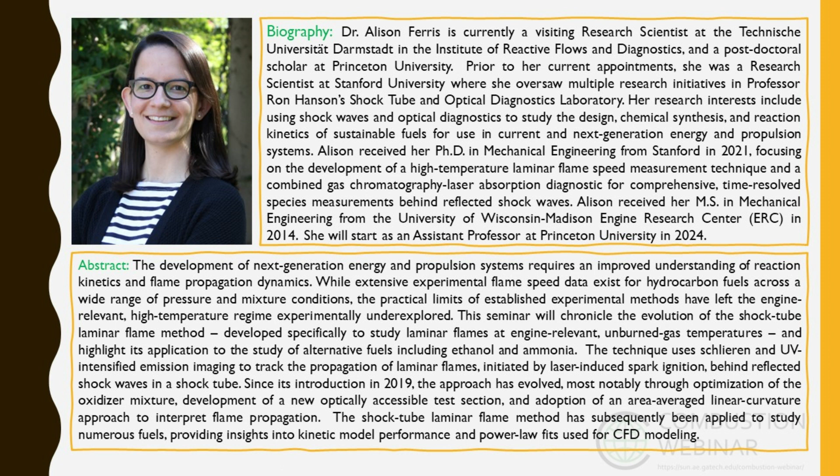I'm excited to share with you my talk on the development of the shock tube laminar flame method and its application to the study of alternative fuels. As Peng mentioned, I currently hold a dual appointment at both TU Darmstadt and Princeton, but the work I'll be talking about today comes from my time as both a PhD student and a research scientist in the Hanson Research Group at Stanford University. All right, let's dive in.

So I guess first you might ask, why develop a shock tube-based method for studying laminar flames? Well, I guess the main underlying motivation here is that we wanted to be able to measure and study flames and measure laminar flame speeds at previously unexplored high temperature conditions. And so that then begs the question, why do we even want to study flames at high temperatures?

Engine operability, efficiency, and emissions are all governed by high temperature flame dynamics. In particular, the laminar flame speed is a global property that captures thermodynamic, transport, and chemical kinetic information about a fuel and air mixture. Laminar flame speed is defined as the rate at which a planar laminar flame, 1D, propagates through a quiescent mixture of unburned fuel and air, or fuel and oxidizer mixture. Throughout the talk, I'll be abbreviating it as this variable here, SU0.

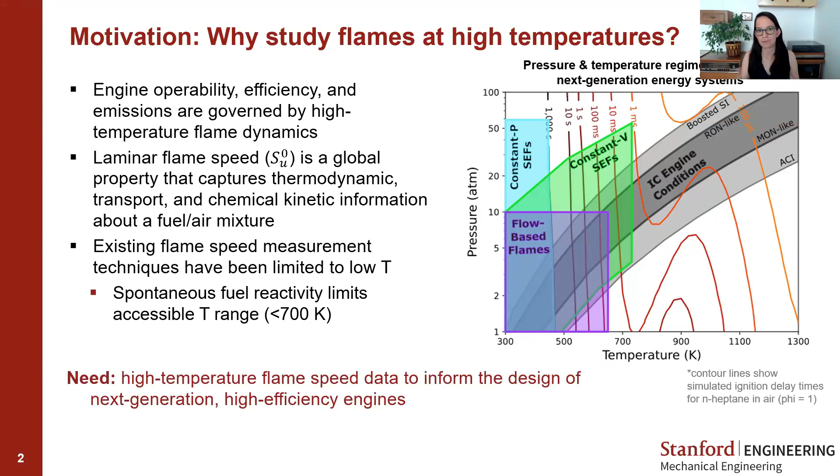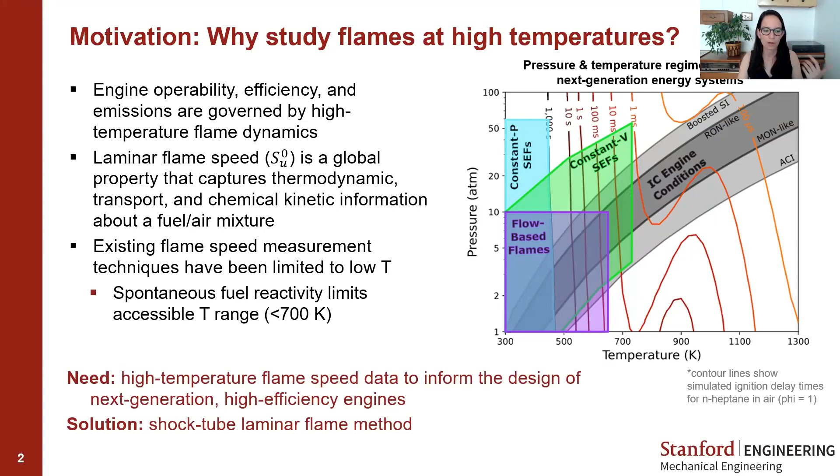What that means is that there's a need for high temperature flame speed data in order to inform the design of these next generation high efficiency engines. And so the solution that we came up with, and that we've been working on for the past couple of years, is what we call the shock tube laminar flame method. That's the main focus of my talk today. I'll talk about the development of this shock tube laminar flame method.

First I'll start with some shock tube fundamentals for those who aren't very familiar with shock tubes. I'll then talk a little bit about the first generation laminar flame method. This actually encompassed most of my PhD work. Then I'll move on to how we designed a new sidewall imaging flame test section, which then led to what we call now our second generation laminar flame method. After that, for the second half of the talk, I'll switch to how we actually apply this method, specifically to the study of two different case studies: one looking at ethanol and isooctane laminar flame speeds, and then give you a sneak preview of some of our most recent ammonia flame speed work.

All right, so let's start off with some shock tube fundamentals. So what is a shock tube? A shock tube is an experimental facility that we use to study high temperature chemistry in a controlled environment. I'm showing a picture of it here. In a nutshell, it's a very long stainless steel tube, but it acts as an impulse heater.

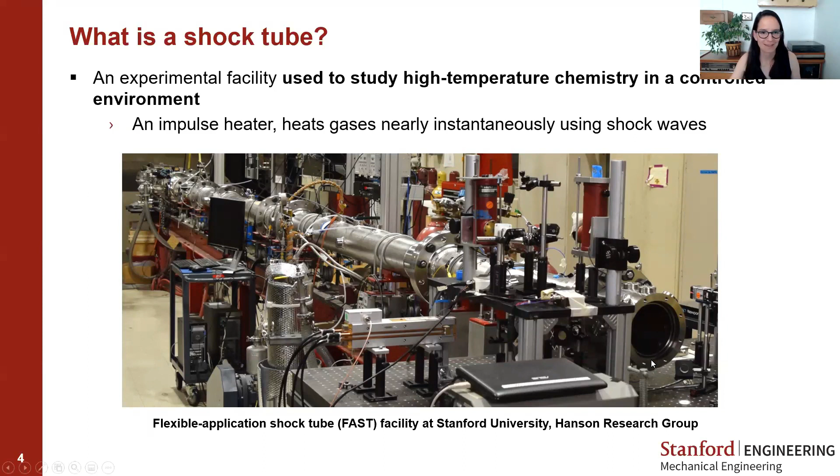So what we use these tubes for is we use them to generate shock waves, which then shock heat fuel and air mixtures, for example, up to elevated temperatures and pressures. We're able to shock heat these fuels to those high temperatures nearly instantaneously. This facility that I'm showing here is what we call our flexible application shock tube at Stanford University in the Hanson group. So how do these tubes actually work?

Well, you have a long tube, and it's divided into two sections. You have a driver section and you have a driven section, separated by a diaphragm, typically a piece of plastic or thin metal. In a typical experiment, you'll first fill your driven section with the fuel or oxidizer mixture that you're interested in studying, usually filled to pretty low pressure. Then you'll fill the driver section with high pressure gas, typically helium, nitrogen, or a combination of the two.

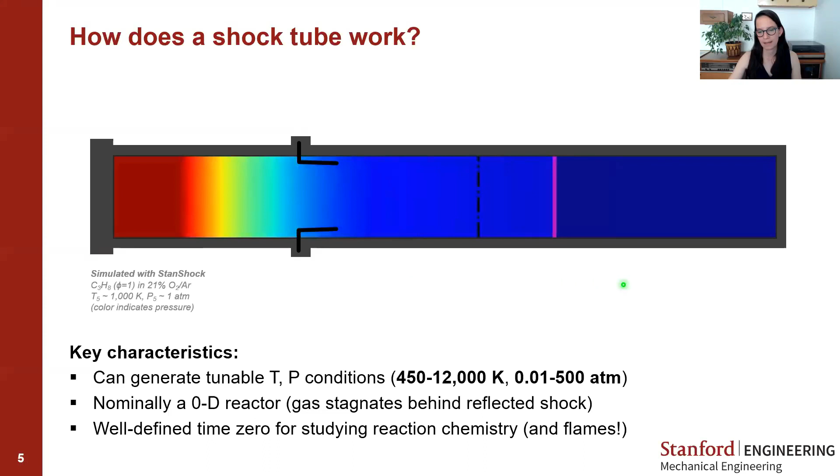So in this experiment, you've now got your driven section filled. You'll start to fill your driver section, keep filling with high pressure gas until ultimately the diaphragm bursts and it sends a shock wave down the tube. That shock wave then hits the end wall and reflects back. And it's in this post-reflected shock region of gas that we then do our experiments.

Some of the key characteristics of a shock tube that are useful, for example, for studying laminar flames: we can use them to generate tunable temperature and pressure conditions. We can hit a wide range of temperatures and pressures, ranging from about 450 Kelvin up to 2,000 Kelvin or even higher, and also pressures ranging from subatmospheric to hundreds of atmospheres.

Also, a shock tube is what we consider nominally a 0D reactor. Because this gas behind the reflected shock stagnates, you now have gas that is just sitting there at the designated temperature and pressure, and we can now model it as a 0D reactor. And finally, shock tubes have a very well-defined time zero. What I mean by that is, because we're using a shock wave to shock heat these mixtures, we know very precisely when those mixtures have reached the temperature and pressure that we're interested in studying, because that shock process happens over a matter of microseconds. So that means that we have a very well-defined time zero.

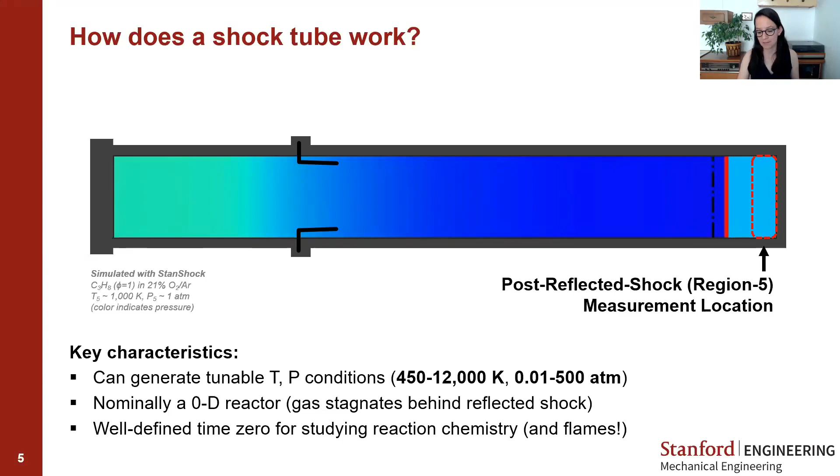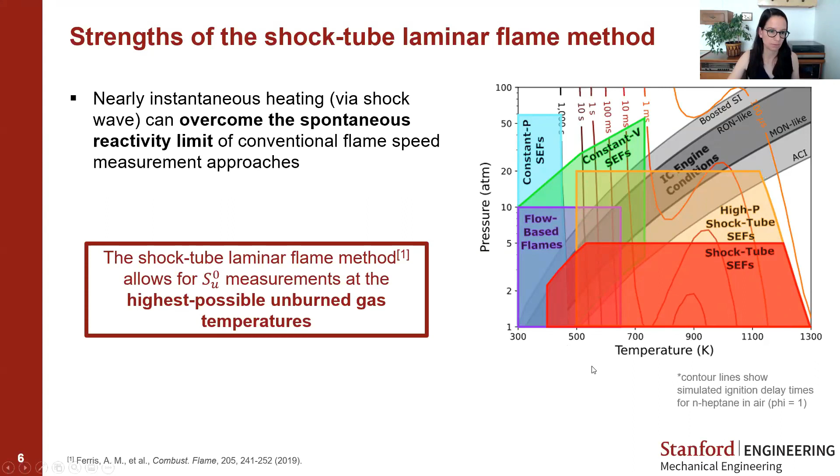All right, so with that general background, let's first talk a little bit about the first generation shock tube laminar flame method. This is what I developed as part of my own PhD work.

So the main goal of this first generation method was to measure high temperature flame speeds in a shock tube. Pretty simple, not as easy in practice to implement, but the strategy we went with was initiating laminar flames behind reflected shock waves using laser-induced spark ignition, and then observing the propagation of this flame. Something to note, a lot of the conventional flame speed measurement approaches use electrodes in order to spark ignite the flames.

But unfortunately, we're not really able to put electrodes into a shock tube, right? We've got shock waves going down this tube and reflecting. So we had to use a non-intrusive method for spark igniting these flames. That's why we've now adopted the laser-induced spark ignition approach.

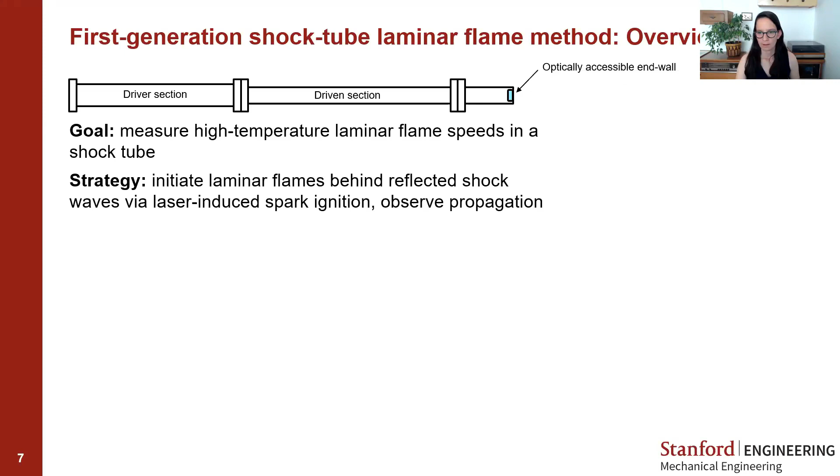All right, so if we look a little closer at this setup, this is just a zoom in on the end section of the shock tube. For these experiments, we had a high-speed camera and a UV intensifier, and a bandpass filter that allowed us to capture OH star chemiluminescence through the end wall.

And you can see here as well this a neodymium YAG laser that we used and focused down to a point in the center of the shock tube, which allowed us to spark ignite these fuel and air mixtures.

So a typical experiment looks something like this. You have the incident shock, it reflects off the end wall, and then the laser is triggered and generates a spark, and then a flame propagating in the shock tube.

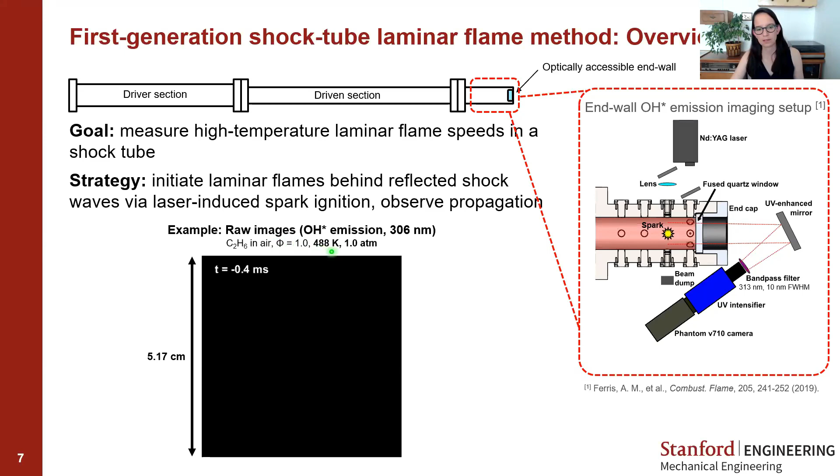So here's a look at what some of these initial images looked like. This is through the end wall, and this is just chemiluminescence - OH star emission, so emission from excited OH radicals. In this experiment I'm showing, this is ethane in air with a phi of 1, and this is a shock heated experiment, shock heated up to 488 Kelvin and 1 atmosphere.

So I'll go ahead and play the video here. We first see the spark, and then we see this flame as it propagates.

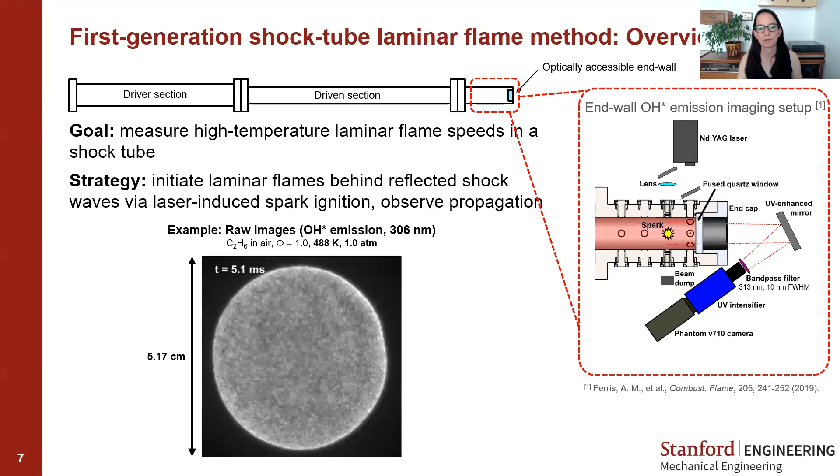So for each experiment, we get a set of images like that, and then we want to process them in order to pull out a laminar flame speed, right? So just very briefly, I'll go through the approach that we took in this first generation method.

Essentially we looked at each image, we binarized it, we used a gradient-based edge detection approach, and then we're able to determine a centroid of each flame image. From that, we were able to locally track the radius of the flame at various radial angles around the flame. By tracking that in time, we were able to get a burn gas flame speed, this SB variable here.

And we were also able to calculate local stretch rate, which is basically a function of surface area of the flame. So by getting those two parameters from the sequence of images, we were able to generate a plot like you see on the right here - burn gas flame speed versus stretch rate.

And all these data points - each data point is basically an individual flame image. So for each experiment, we want to be able to identify this quasi-steady state or quasi-steady growth region in the flame. We want to make sure that we're not considering data that's impacted by ignition or by late time flame instabilities.

And so once we identify this quasi-steady region, we then use a linear curvature model in order to determine this SB naught parameter. This is the burn gas flame speed, or the flame speed relative to the burn gas, unstretched. And then from that, using continuity, we're able to determine SU naught, or the laminar flame speed.

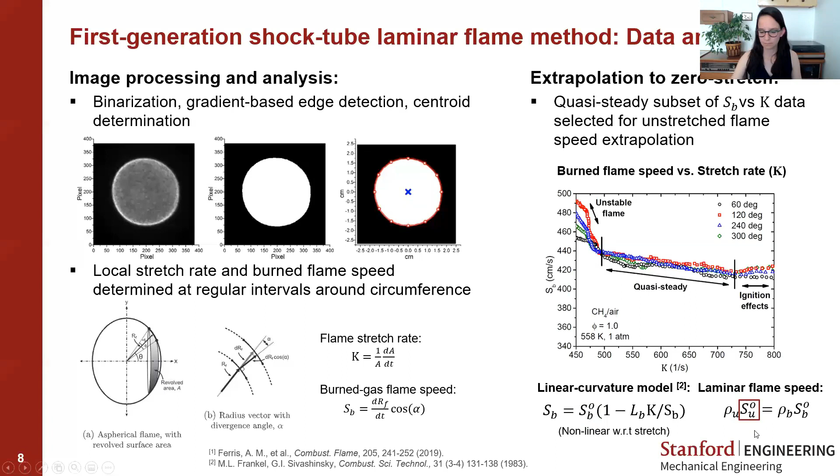So here's a look at some of this early data. This is from our first publication that I wrote in 2019, so now 4 years ago, where we focused on high temperature methane and propane flame speeds.

Moving from left to right, the black dots here are our experimental measurements. All the other points are either literature results, and the lines are model predictions. So you see methane here, in the middle we have our propane and air measurements, and then on the right we've got propane in a modified air oxidizer where we've replaced about 32% of the nitrogen with helium. At the time, these were actually the highest temperature propane laminar flame speed measurements ever published.

That was exciting, but we obviously saw that there was some room for improvement. For example, we wanted to reduce the scatter in our measurements, reduce the uncertainty associated with each point, and also push to higher temperatures.

Interestingly, you'll notice that our methane and propane flame speeds, measured in air, weren't reported above about 580 Kelvin. The reason is that at higher temperatures, as we went above that roughly 580 Kelvin point, we started to see flame distortion. We didn't report any of those distorted flames in the initial work -- we just wanted to focus on nice laminar flames propagating appropriately. But we were limited in temperature space by this flame distortion.

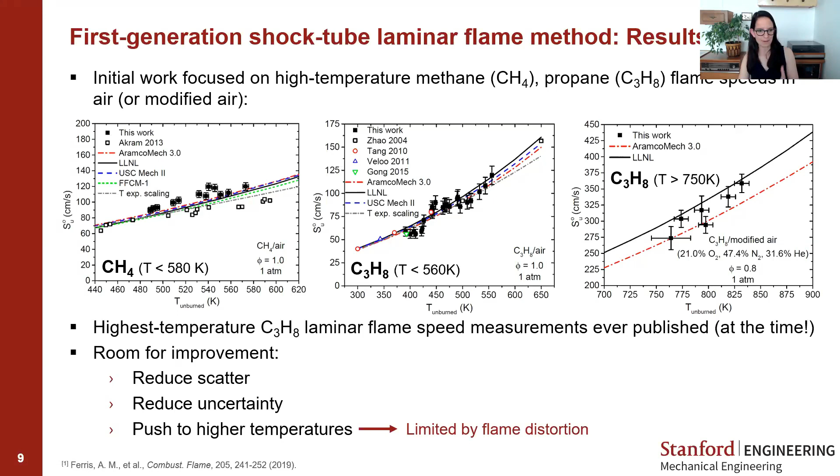So here's what I mean by distortion. This is a look at a methane air flame experiment, shock heated to 592 Kelvin. From left to right, we're going in time, and we see the initial flame kernel, and then we start to see this sort of haloing effect.

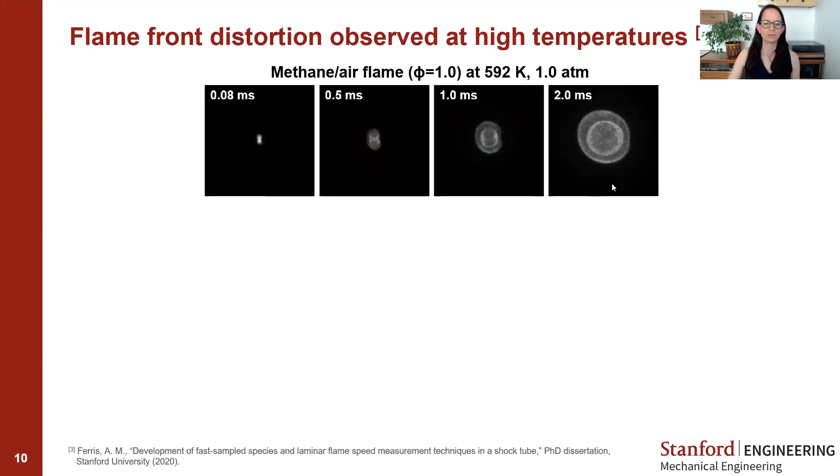What was interesting to note is that this is actually temperature dependent as well. If we look at a methane air flame at 558 Kelvin, for example, it actually looks fine -- we have a nice stable flame. But even just increasing the temperature by roughly 25 Kelvin, you end up with this haloing effect. As you keep going up in temperature, that little halo in the middle starts getting smaller, until we reach a point where the flame is just completely distorted for the whole experiment.

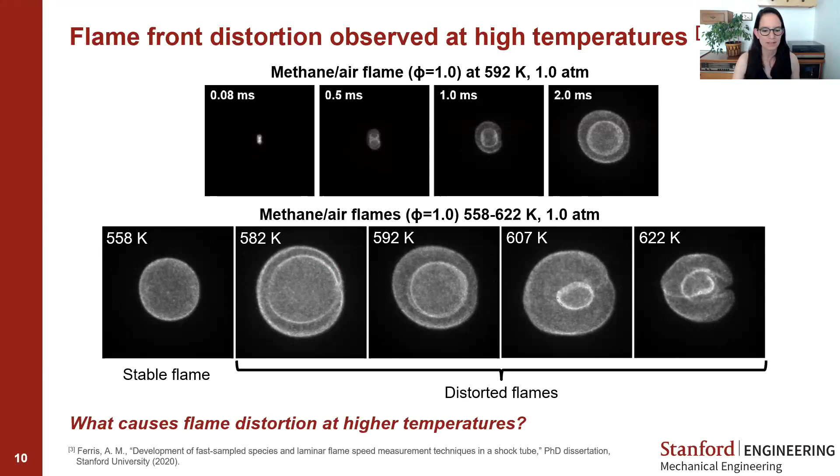Now, these aren't your typical thermodiffusive or hydrodynamic instabilities. So what we wanted to understand was really what causes this flame distortion at higher temperatures. In order to get to the bottom of this, we performed what we call a meta-analysis of factors affecting flame stability in a shock tube.

Basically, at this point we said, okay, we've taken a lot of measurements of different fuels and different conditions -- let's take a look at all the data and try to understand where we start to see this instability happen, or when we start to see flame distortion. Is there some factor, some experimental parameter, that's actually causing or linked to this critical temperature beyond which we see flame distortion?

Some of the experimental parameters we considered in this analysis included the pressure of the experiment, gamma -- the ratio of specific heats of the test gas, the average molecular weight of the test gas, the Lewis number of the test gas, and also the spark location -- where we are actually sparking those flames within the shock tube.

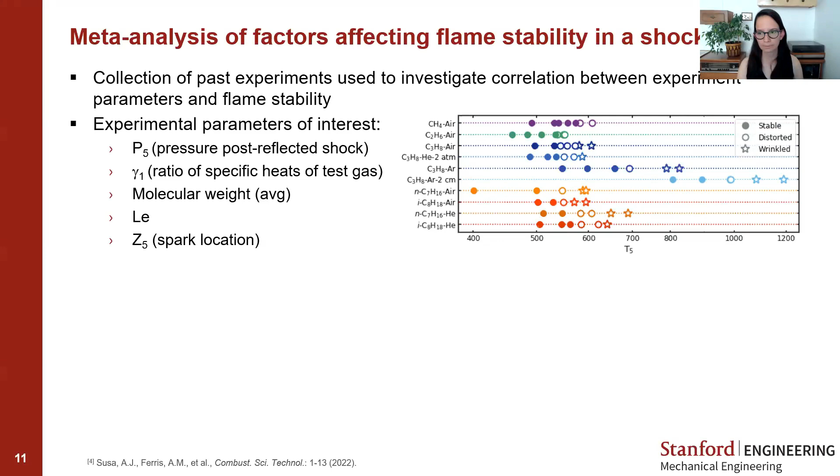So we performed a logistic regression analysis to determine an expression that would allow us to predict this T critical, the temperature at which our flames transition from stable to distorted. We came up with the expression shown here. I won't go into the math too much, other than to say that by fitting this expression to the data, we were able to predict 93% of the time, accurately, this critical temperature at which flames transition from stable to distorted.

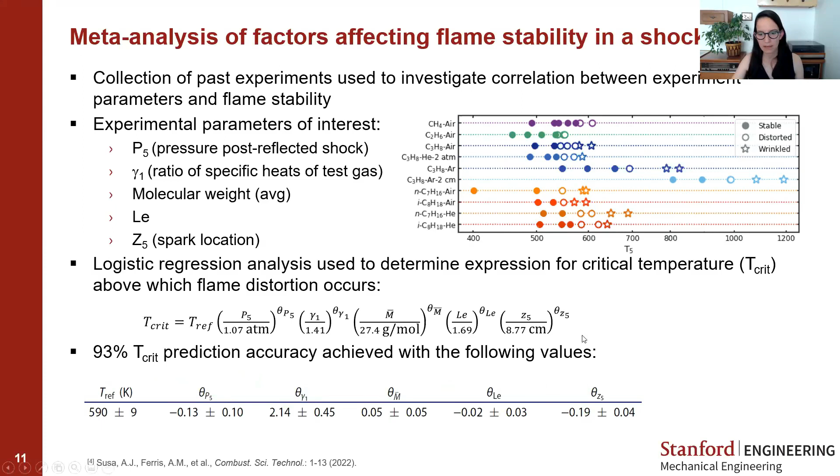Using these coefficients, these theta values, these exponential values, what we find is that the largest exponent has to do with gamma of the test gas, the ratio of specific heats. Gamma has the strongest impact on the critical temperature where we go from stable to distorted flames.

We also found that argon is a superior diluent to nitrogen, and you can see that from the data in this figure. The two data sets with the highest critical temperature, where we obtain stable flames at the highest temperature, are these two blue data sets, the dark blue and the light blue. What they have in common is that they were both conducted with argon as the diluent. The rest are either in air or helium.

Something else to note is that the next largest factor is the spark location. Looking at the difference between the dark blue and light blue data sets, they're exactly the same except the light blue data set was taken by spark igniting the flames 2 centimeters from the shock tube end wall. So we've learned that the test gas mixture we use, and where we spark ignite these flames in the shock tube, are both important.

We wanted to look into this further and figure out how to optimize, for example, where we spark ignite these flames. We are limited in our test facility because, as seen in the first generation approach, we were basically spark igniting these flames through a small optical port. So we wanted better flexibility in our ability to run these experiments.

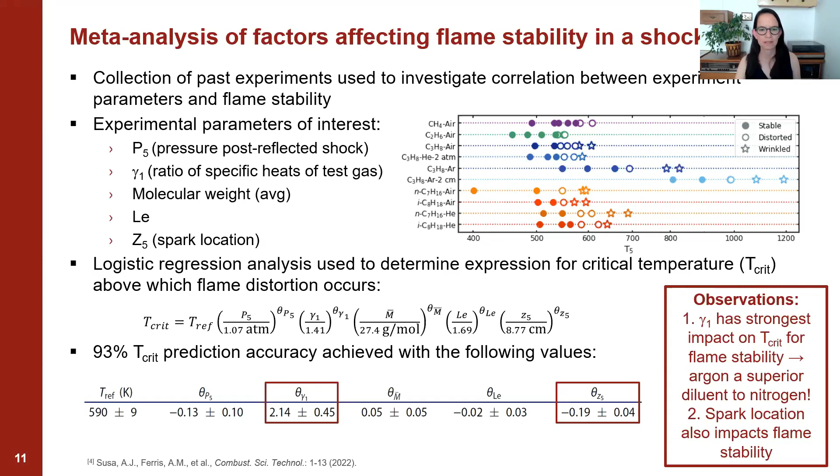That led to the design of what we call the sidewall imaging flame test section, or affectionately known as SWIFT. Every new test section needs a cool name. The primary goals of this test section were to expand our sidewall imaging access while still minimizing flow disturbances.

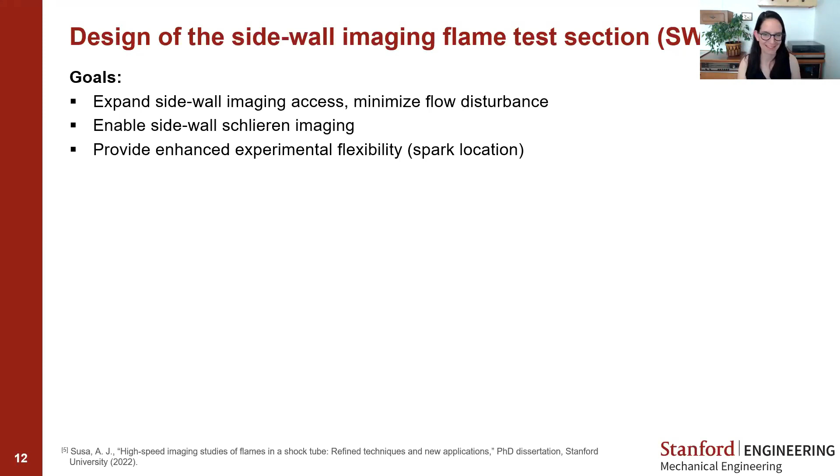We didn't want to, for example, put flat square windows in a round facility. We wanted to minimize flow disturbances through this test section, enable sidewall schlieren imaging beyond the emission imaging from the first generation, and enhance experimental flexibility, the ability to move where we're sparking the flame within the shock tube. This test section was designed by one of our PhD students, Adam Susa, and you can read much more detail in his PhD dissertation.

The first design iteration Adam went through was to use singlet lens windows, meaning curved windows on this test section, one on each side, allowing us to see through the facility. To assess how this might work, Adam did a ray tracing exercise, shown here in the bottom right. This looks at if you have a ray of light coming in from the left and it goes through both lenses, where does that ray come out relative to where it went in?

That's what's plotted on the far right, what we call aberration. If you look through the center line of this facility and these lenses, you see very minimal distortion, everything looks fine. But if you look a little higher or lower from that center line, you start to see significant distortion. Anyone who's tried to look through a round facility using round windows is familiar with this, it just looks like a lens. So that would not be an ideal scenario, or we'd have to do a lot of corrections to do schlieren imaging through this test section.

So the second iteration Adam considered was using sidewall cemented doublet windows, instead of just one window, actually cementing two together.

So what we see now, if we again go through this ray tracing exercise, looking at the rays coming in and coming out, it looks a little funky, but something you should note is the value on this axis. If we go back to the singlet lens, we see that we are going from -20 to 20 arc minutes. But now using the cemented doublet lenses, we have aberration going from -0.5 to +0.5. So we've improved upon the aberration by a factor of 40.

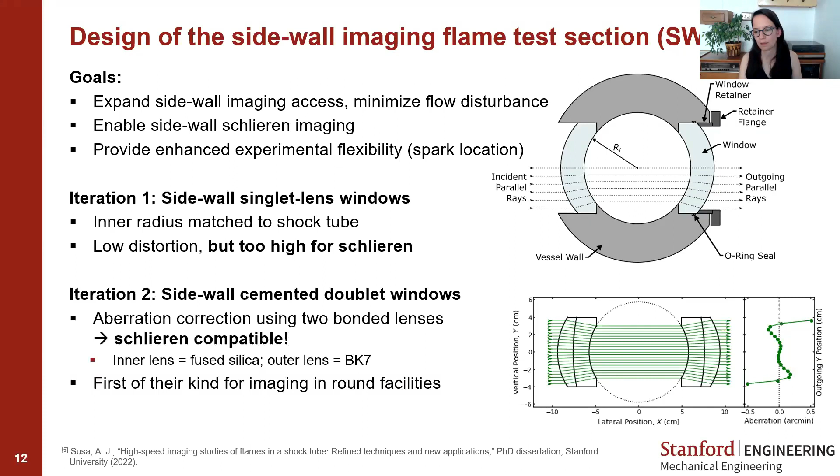So here's what this looks like in SolidWorks land. We have a 3D rendering on the left, looking at it from the side, this test section, and then here's a look at the end view. We have these large cemented doublet side wall windows, 18 centimeters wide by 6.4 centimeters high. We also have these high aspect ratio slot windows, 18 centimeters long, 2 centimeters wide. And then we've maintained basically the optical end wall, which has a diameter of 8 centimeters.

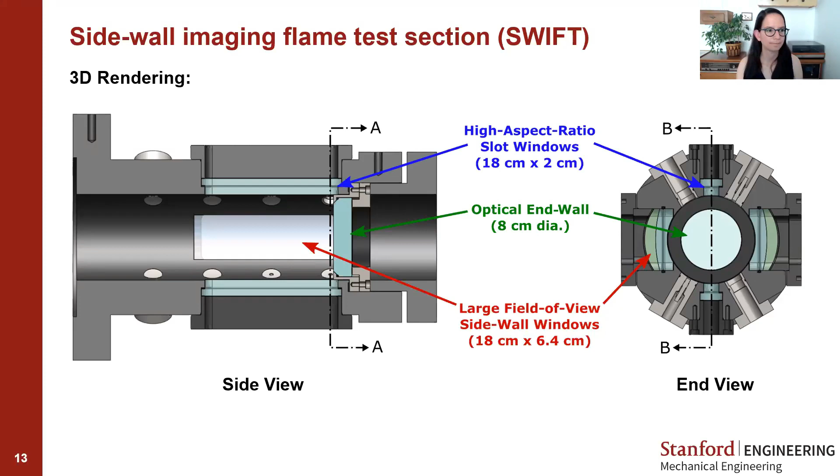Here's what this looks like in real life. You see a photo of the test section on the left, and on the right, here's a look at that cemented doublet, so the two lenses. The inner one that actually interfaces with the gas in the shock tube is made of fused silica, and the outer one is BK7 optical glass.

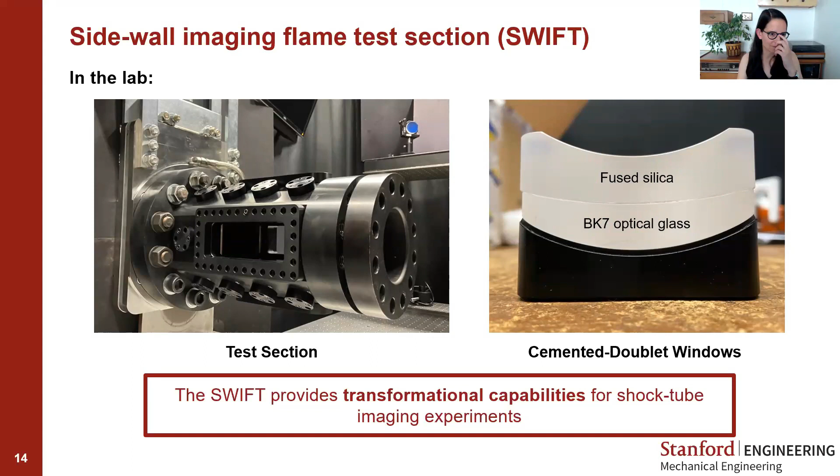So really, for these kinds of flame experiments that we're trying to conduct, this test section has really been transformational in allowing us to study the flames in the way that we would like. And so this test section now led to the advent of what we call our second generation shock tube laminar flame method. I'll go through that briefly now.

Some of the primary improvements over the first generation method incorporated into the second generation shock tube laminar flame method include using argon as a primary diluent instead of nitrogen or air. We now have simultaneous end wall and sidewall imaging capabilities. And we also now can flexibly choose where we actually spark ignite these flames within the shock tube.

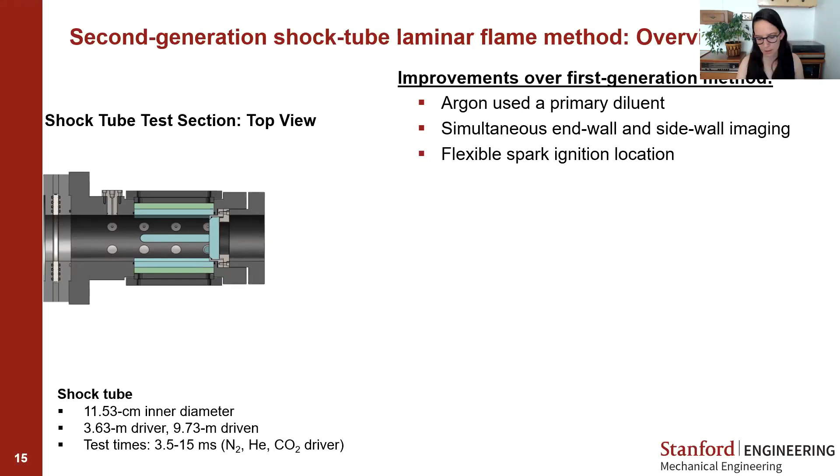In terms of instrumentation, we have now high-speed imaging that we're conducting through the sidewall. This is looking at schlieren imaging, so density gradients through the sidewall. One of the key factors here is that this whole system is actually on a rail, so we can move it left and right in order to be able to flexibly spark ignite these flames in various locations.

Simultaneously, we have end wall imaging, and this is UV-intensified chemiluminescence. In most of the experiments that I'm presenting today, we are looking at excited CH radicals. In addition to that, we're maintaining that laser-induced spark ignition system, again using a neodymium YAG laser. This time it's actually coming from the top of the shock tube, the direction of the laser, which allows us to spark ignite the flames.

So in a typical experiment, here's what this looks like. Again, incident shock comes, reflects off the end wall. We then trigger the laser to then spark ignite these flames, which then ultimately propagate.

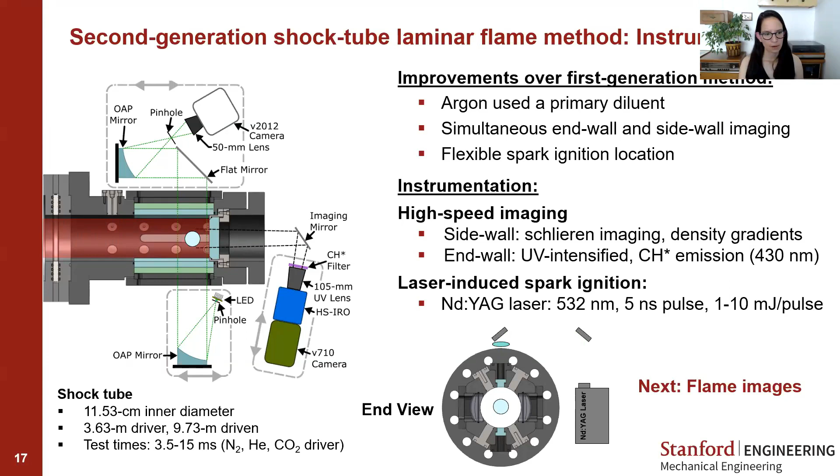Let's take a look at some of the images that we get from this second generation method. This experiment that I'm showing here is looking at propane flame speeds. This is propane in what we call argon air - very clever, basically it's air, but we replaced that 79% nitrogen with 79% argon, so that's what we call argon air. So this is propane in argon air with an equivalence ratio of 1. This experiment has been shock heated to 650 Kelvin at 1 atmosphere, and we're actually spark igniting this one about 8.5 centimeters from the end wall.

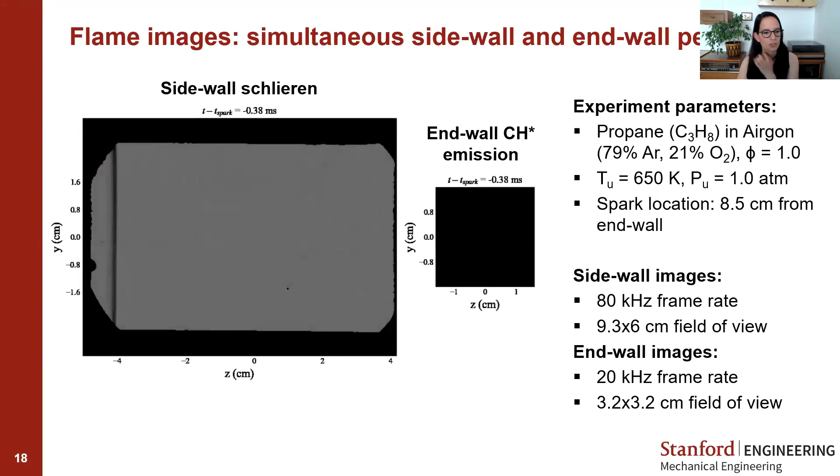So what I'll show here is simultaneous sidewall schlieren images, as well as emission images from the end wall of the shock tube. Here we go. First, you'll see the incident shock. Now it hits the end wall out of frame and comes back, so that's now the reflected shock. And then we have the spark event and then flame propagation. Again, these videos are roughly synced up from the sidewall and the end wall.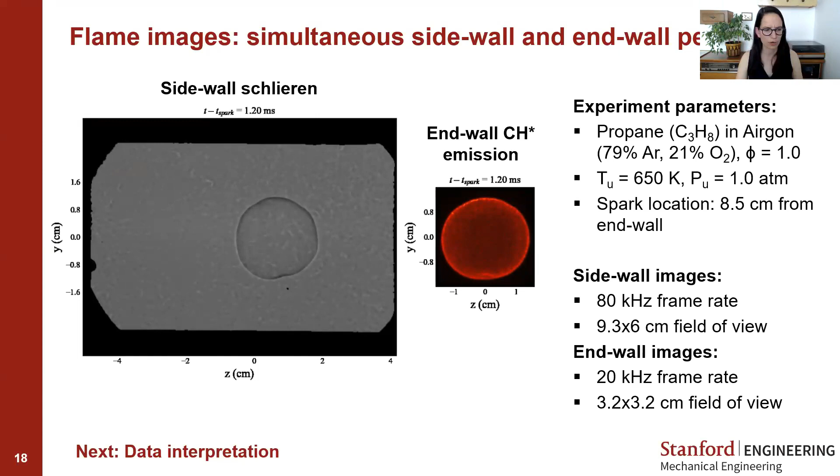All right, so once we have those images in hand, we actually also adopted a new approach for our data interpretation. We're now using what we call our area averaged linear curvature model, where essentially we're extracting flame front contours from these schlieren images.

Something that we saw when comparing end wall images with sidewall images is that the flames are basically symmetric about the axis of the shock tube, so these flames are cylindrically symmetric. When we're looking at them from the side, the axis of the shock tube, for example in this image, is running from left to right. We call this the z-axis.

From these images we can define a vertical extent of the flame as we march in space across the z-axis, and from that we can get an effective radius at each z-axis position. This effective radius is what we use to calculate our average flame speed, defined as the time rate of change of the volume of the flame over the surface area of the flame. We can also define average flame curvature, related to the surface area, again all calculated relative to this effective radius as a function of z through the flame.

By using this area averaged model, we find it does not rely on the flame being stationary. Even if there's some slight movement of the flame within the shock tube, it doesn't matter because what we're essentially looking at is a volume over an area. Also, it does not impose any sort of spherical assumption on the flame, so we can account for some distortion, such as what I'm showing in this image above.

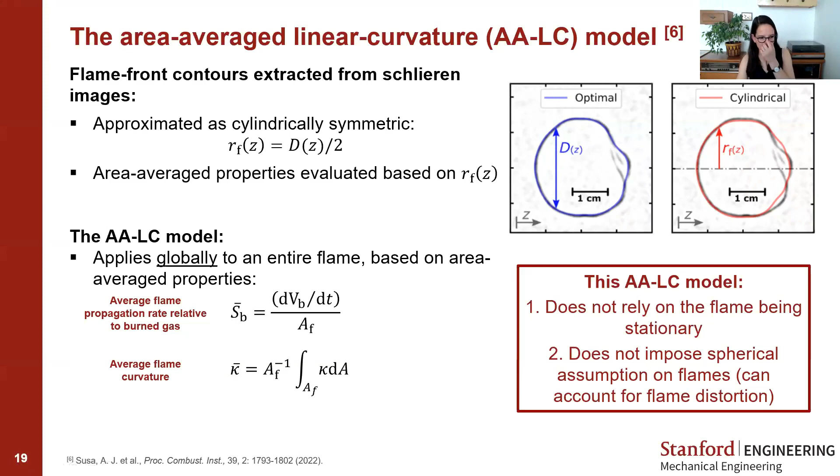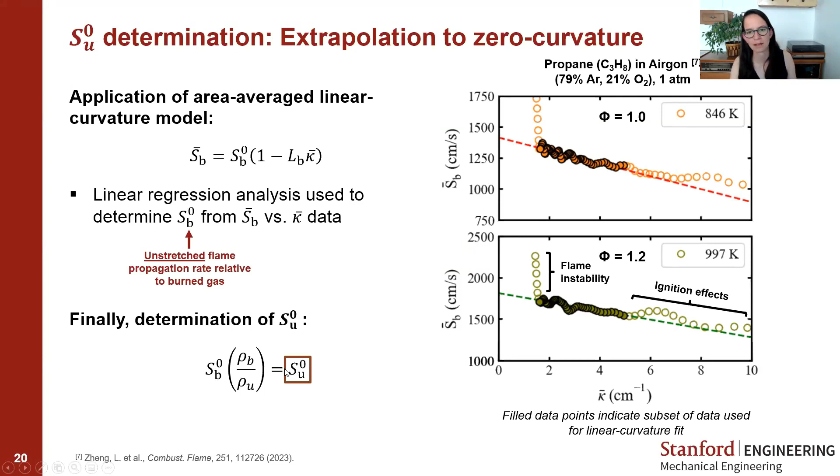Okay, so I've now talked you through the evolution of the shock tube laminar flame method. What I'd like to do next is focus on two case studies. Let's take a look at how we've applied this method to the study of ethanol and isooctane flames. After that, I'll talk about some ammonia flame work.

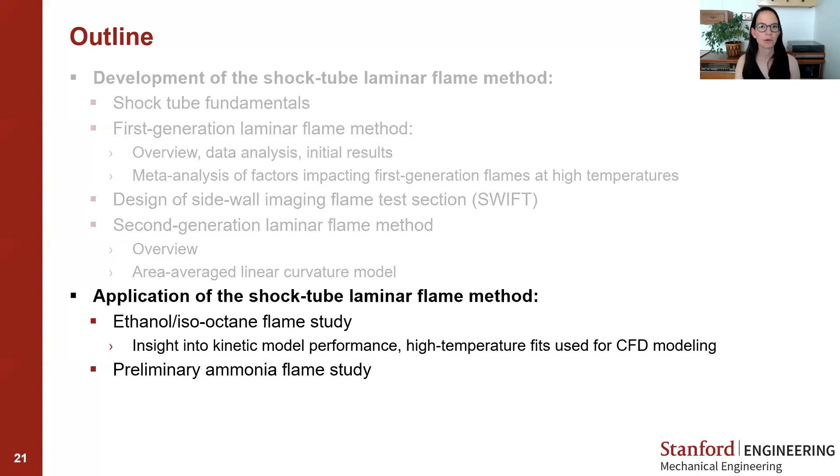We used the second generation shock tube laminar flame method to study high temperature laminar flame speeds of ethanol, isooctane, and blends of the two, specifically E50 and E85, where E50 is a 50-50 by volume blend of ethanol and isooctane. We looked at flame speeds ranging from unburned gas temperatures of 450 to 1020 Kelvin at 1 atmosphere, and investigated a range of equivalence ratios from lean to rich.

I'll now show two videos representative of some of these experiments. On the left, an ethanol experiment, and on the right, an isooctane experiment. In this ethanol experiment, this is stoichiometric ethanol in argon, replacing the 79% nitrogen in air with argon. This experiment had the gas shock heated to 499 Kelvin and a pressure of 1 atmosphere. I'll go ahead and play the video.

Again, incident shock, reflected shock, and then we see spark ignition and flame propagation. All right, that's the ethanol case.

And on the right, I'll now show an isooctane example. This is isooctane and argon, shock heated to 854 Kelvin at 1 atmosphere. Incident shock, reflected shock, spark ignition, and flame propagation.

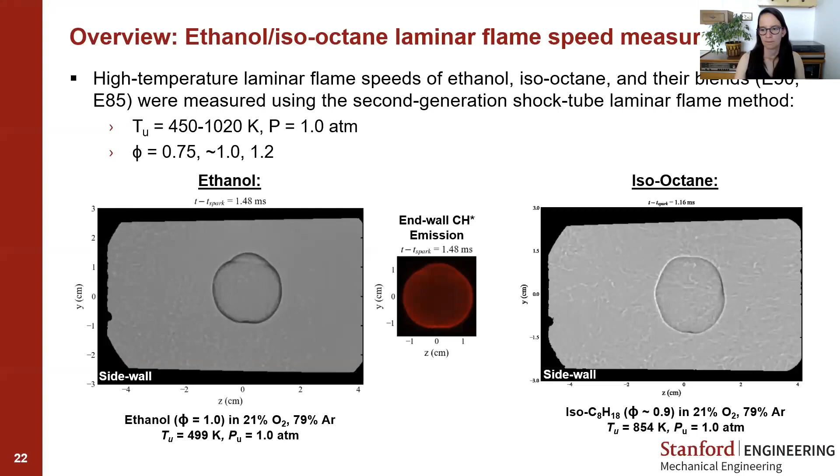Once we have those flame images and go through our area average linear curvature method approach for analysis, we end up with flame speeds that look like this. Each column here is a different fuel, and each row is a different equivalence ratio. The gray points are experimental results, whereas the lines are kinetic model predictions.

I know it's a lot, so instead let's just focus on one fuel. Let's take a look at these ethanol flame speed measurements - ethanol and argon at three different equivalence ratios over a range of temperatures, all at 1 atmosphere.

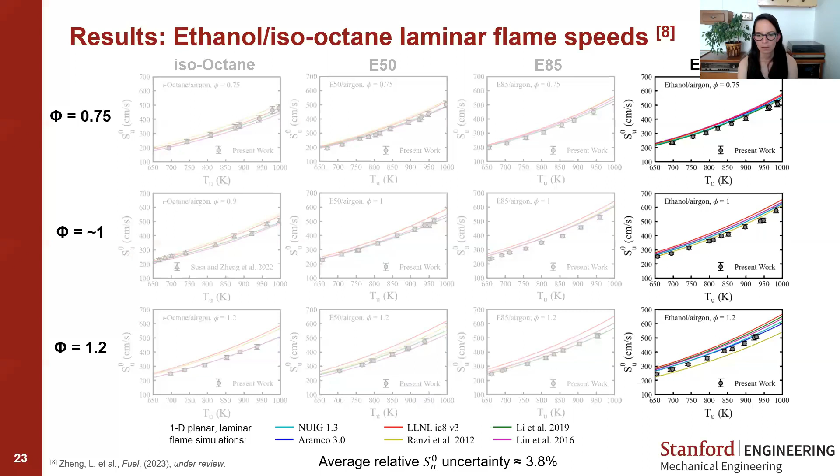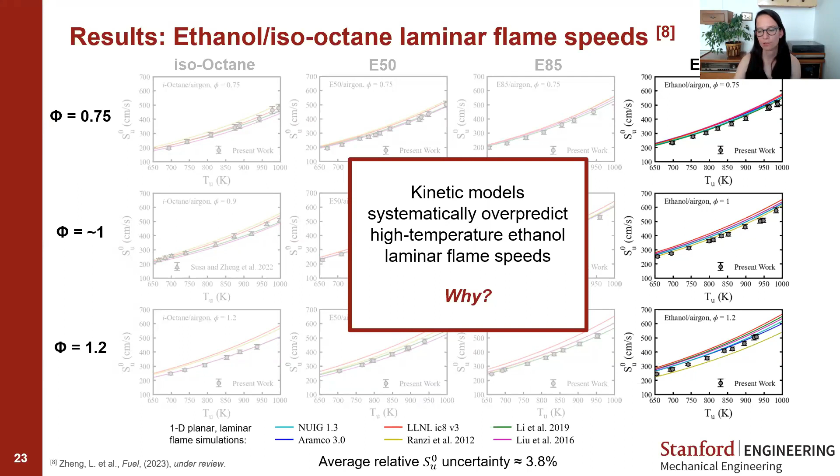One key observation here, if you just look at these 3 plots, is that the kinetic models seem to systematically overpredict the high temperature ethanol laminar flame speeds. And of course, we're experimentalists, so we want to understand why these kinetic models are overpredicting the measurements.

These 3 reactions are, first, H plus O2 goes to OH plus O — a usual suspect that comes up a lot in combustion chemistry simply due to the fact that it's a chain branch reaction, so that's not a surprise. Next we have CO plus OH goes to CO2 plus H. And third, we have the third body collision reaction of HCO plus M goes to CO plus H plus M.

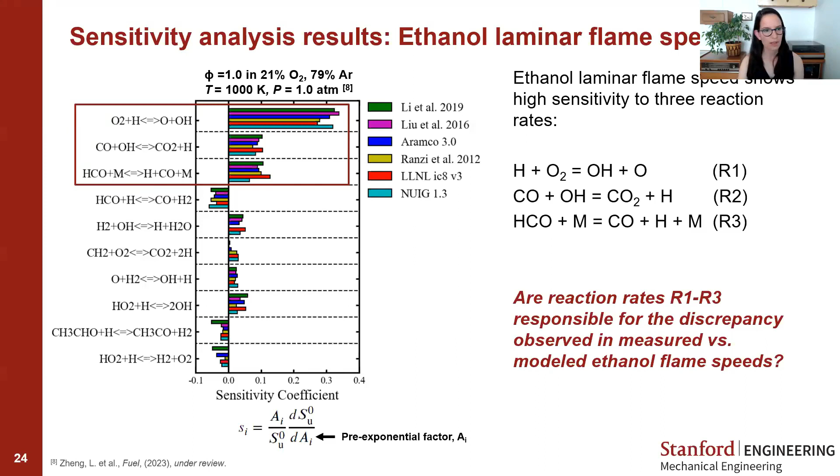Starting with the first reaction, H plus O2 goes to OH plus O, it's a very well studied reaction rate — we have data across this whole temperature range. We find that the reaction rates used by the models differ by up to about 62%. It's worth noting you only see 3 lines here because 4 of the 6 models actually use the same reaction rate, all falling under this teal line, NUIG 1.3. In the end, we see that this reaction rate used by NUIG 1.3 and those other 3 models shows the closest agreement with available experimental results.

For Reaction 2, CO plus OH goes to CO2 plus H, we see that the reaction rates used by the models differ by up to about 41%. The reaction rate used by the Lawrence Livermore and the NUIG models shows the closest agreement with these available experimental results.

Then third, this R3 reaction, HCO plus M goes to CO plus H plus M — we see that the reaction rates used by the different models differ by up to about 218%, and they also have different collision efficiencies for various molecules. What we see is that the reaction rate used by the Ranzi group shows the closest agreement with the available experimental results for this reaction rate.

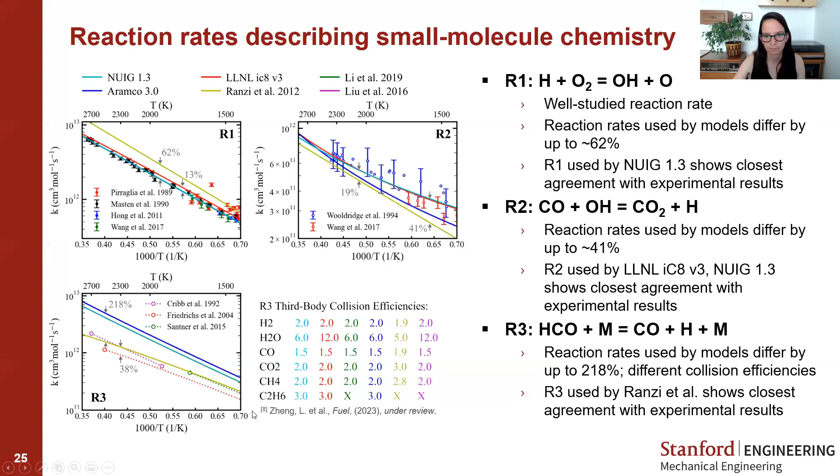Next, we want to modify these kinetic models to have common R1 to R3 expressions. We want to see if bringing these rate expressions into convergence for the different models takes care of our problem. To do that, we had to choose which R1, R2, and R3 rates would be most appropriate, so we went with the reaction rates that most closely match the experimental results available for these reaction rates.

That means we used R1 from NUIG 1.3, R2 from the Lawrence Livermore model, and R3, the reaction rate that was used by the Ranzi group. Here's what this looks like.

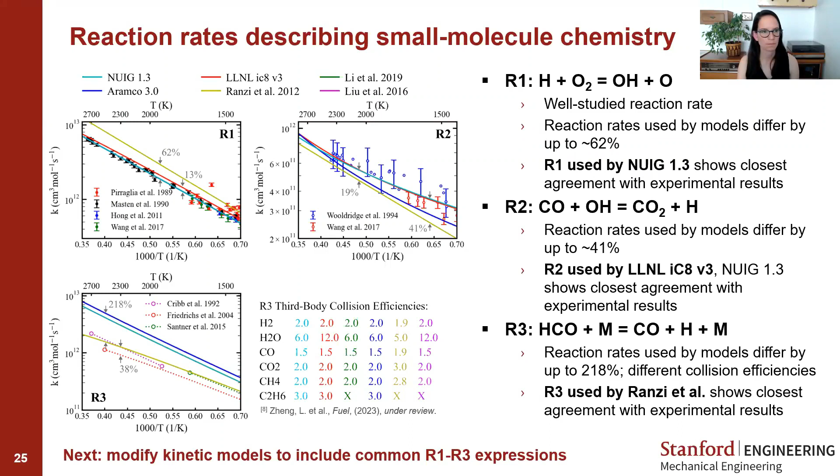Here's what the models predict after we made modifications to R1 through R3. First, by just changing these three reaction rates, bringing them into agreement with existing experimental data, we're able to bring the model predictions into agreement with experimental results within the experimental uncertainty. We also see better agreement between the kinetic models themselves. Previously there was an average difference of about 10% in their predictions, and now they show an average difference of about 6%. This is an interesting case study showing that using rate constants aligned with high accuracy experimental measurements leads to superior kinetic model performance. That's an important takeaway.

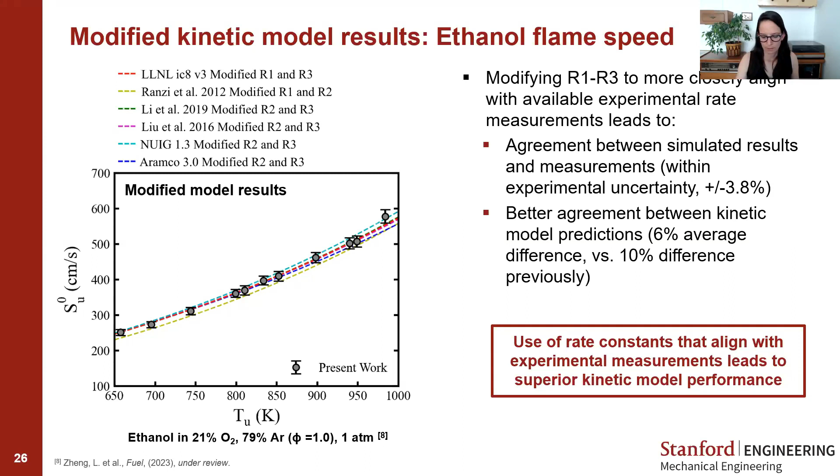Something we often hear is, okay, you're measuring flame speeds in argon, but most fuels are oxidized in air, not argon. It's always reviewer number 2.

So something we want to look into is, if we're taking measurements in an argon diluent, can we back out an air equivalent value for these experimental measurements? To look into that, you have to understand the difference between a flame speed measured in an argon diluent and one measured in air. There are three main candidates: differences in flame speed are typically driven by transport properties, thermodynamic properties, and chemical kinetics.

First, we took the transport properties associated with argon and swapped them for the transport properties of nitrogen, changing only the transport properties to understand how they specifically impact flame speed. When we modify the argon transport properties to be that of nitrogen, the result isn't really that different. This tells us that the transport properties of these diluents, argon versus nitrogen, are not what's leading to the flame speed difference.

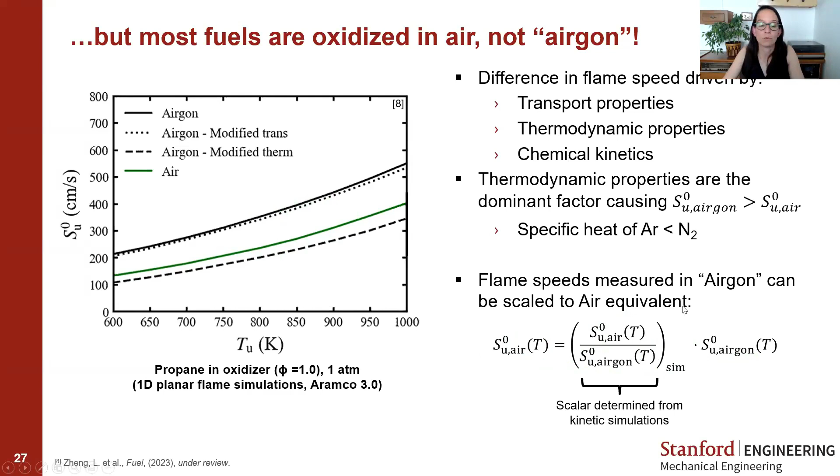Knowing that the difference is predominantly due to thermodynamic properties, we set about figuring out if we could scale our measurements. For example, if we measured a flame speed in argon, can we determine a scalar to go from a measurement in argon to a measurement in air? The scalar is just a ratio of laminar flame speed measured in air, like along this green line, over a flame speed measured in argon, like along this black line. Can we define that ratio as a function of temperature and use it to scale our argon measurements into air equivalent measurements?

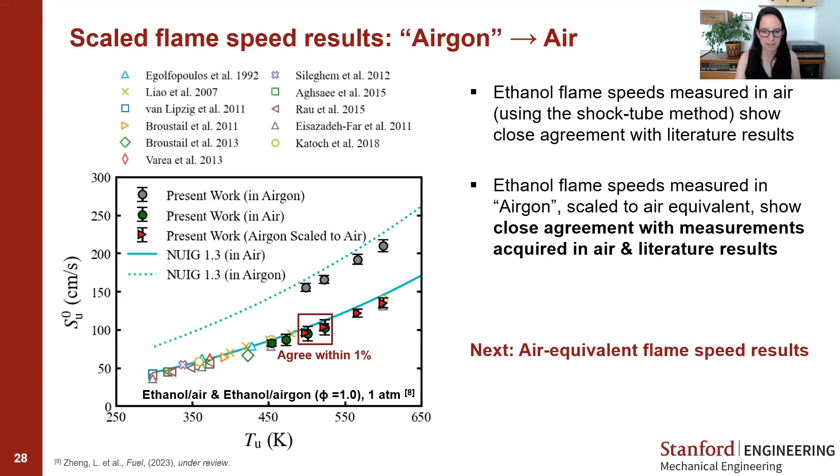Now, before the advent of the shock tube measurement method, the way we would often obtain or estimate flame speeds at these high temperatures was to use empirical fits, for example power law fits. So what we wanted to look into is, now that we have this data at high temperatures, do those fits still hold and perform well against these experimental measurements?

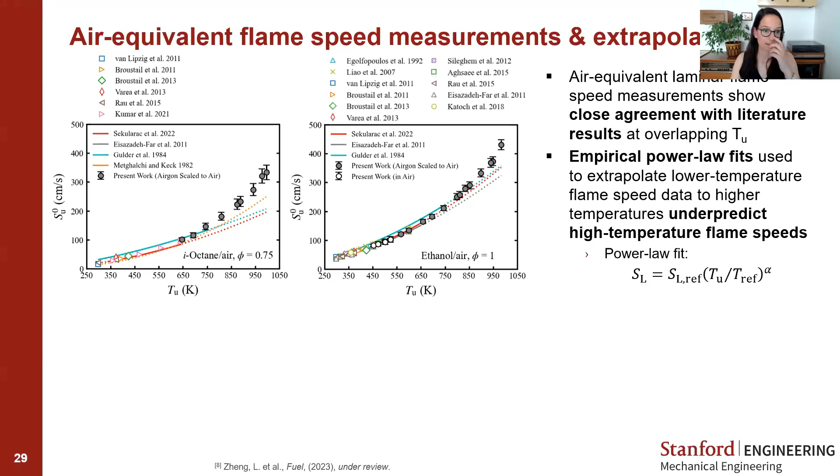Something we wanted to look into next is whether there's a better functional form that might match or better fit this data. So what we propose is the use of what we're calling a non-Arrhenius fit. It looks very similar to the power law fit, but now we've added an exponential term. What we see is that this fit actually captures both the low temperature data and the high temperature data much better than the power law fits.

If we now apply this to some of the other fuel mixtures we were looking at—this is E50, and now we're looking at E85—we see similar trends. I'm not showing the power law fit here, but the non-Arrhenius fit does a good job of capturing the high temperature flame speeds as well as the low temperature flame speeds. That's a big takeaway here: power law fits are not very good at capturing high temperature flame speeds, while something like a non-Arrhenius fit is a much better functional form.

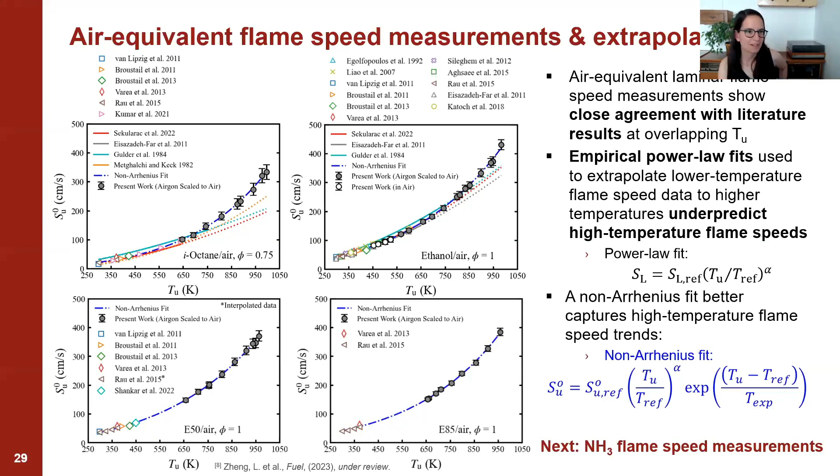As we approach the end here, I wanted to give a sneak preview of some of our ammonia flame speed work. Ammonia is a big topic in the community right now, so we are also looking into this, and I thought folks might want to see some of our most recent work.

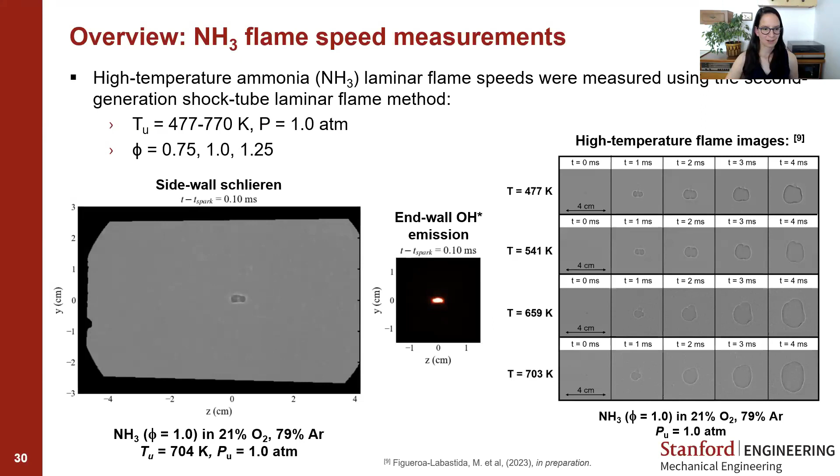Again, we're using this shock tube method to measure laminar flame speeds of ammonia at a range of temperatures, from 477 to 770 Kelvin, shock heated to 1 atmosphere, at a range of equivalence ratios. Here at the bottom left is a video of one of our ammonia experiments, at a post-shock heated temperature of 704 Kelvin—this is ammonia in argon. We see the incident shock, the reflected shock, and then spark ignition and the propagation of this ammonia flame. Very slow.

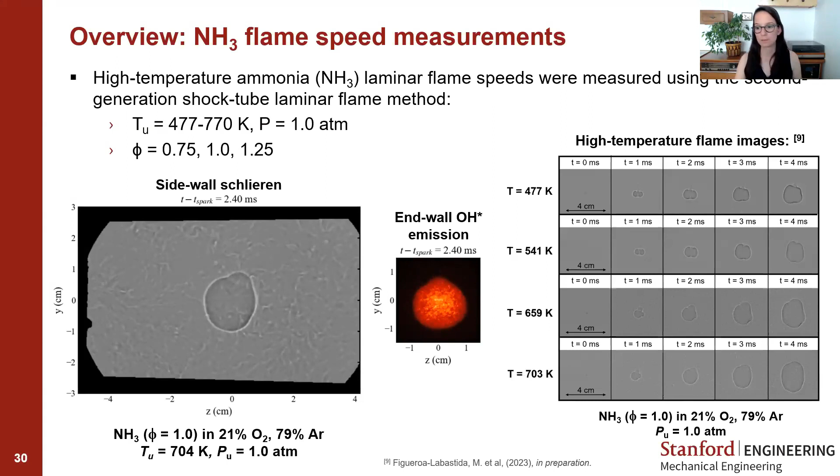And over on the right, I'm showing you some additional experiments at additional temperatures. Ammonia flames are difficult to work with, but nevertheless, we are still able to extract flame speeds from these sequences of images.

Here's a look at some of our preliminary argon results. These are ammonia flame speeds measured in argon. The experimental data is in the blue squares, and we're also showing kinetic modeling results from various kinetic models. One of the first things that jumps out is that there's wide disagreement in the predictions from the various models.

That's to be expected; everything is a work in progress right now. However, at least from the stoichiometric case here, it does seem that the Okafor model from 2019 captures our experimental results the best of the 5 models considered.

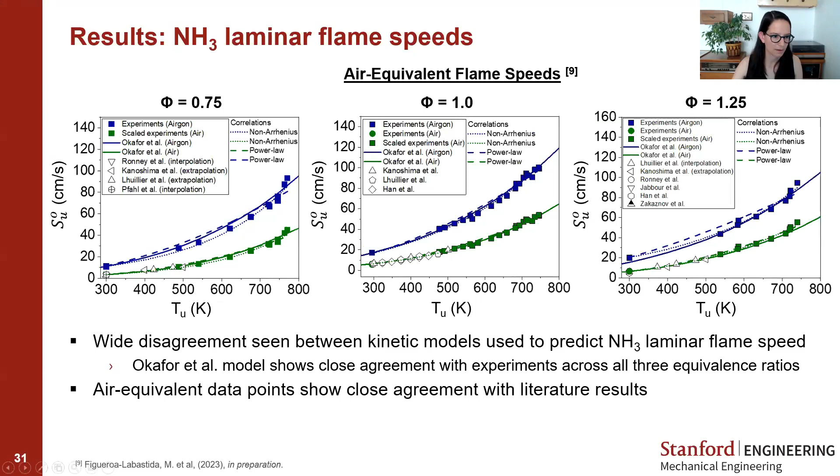Now if we report these as air equivalent flame speeds, the blue points are still the measurements in argon, and the green points are the argon measurements that have now been scaled to air. So again, we're checking: do these air equivalent measurements match available literature data? We're encouraged to see that yes, they do at the lower temperatures.

So, stay tuned. We're currently preparing this paper and hope to submit it for publication shortly in order to get some of this data out there.

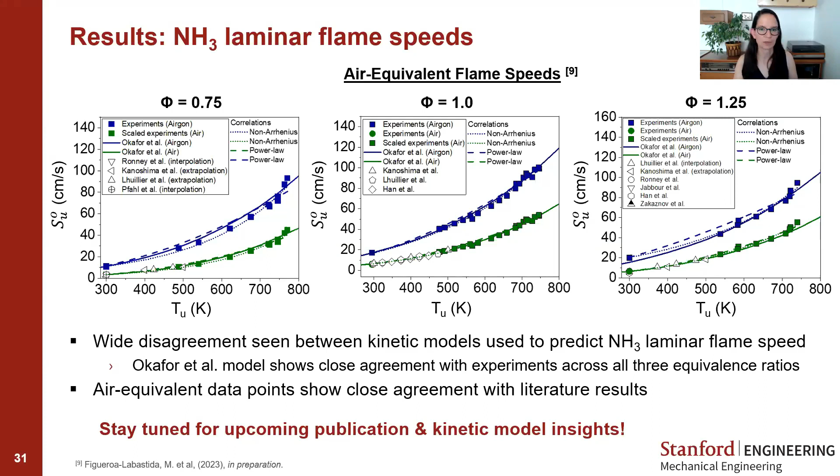That brings me to the end of my talk. If you take anything from this talk, let it be that the shock tube laminar flame method allows us to study laminar flames at previously unexplored high unburned gas temperatures.

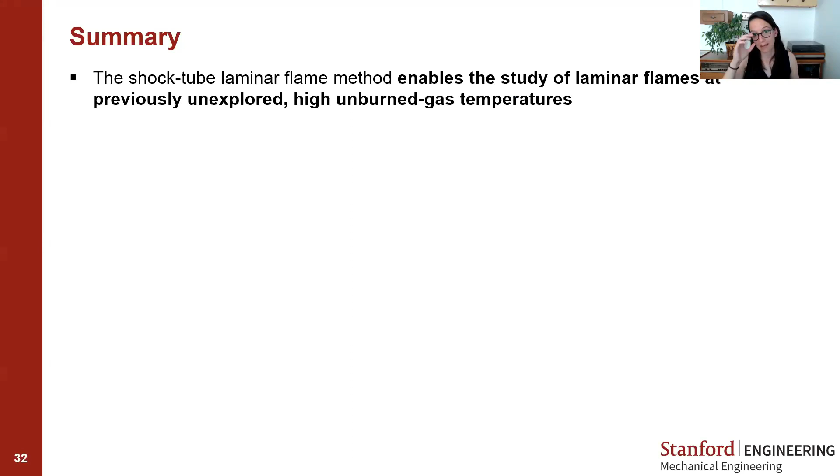I walked us through the development of this approach over the years and how we have now adopted what we call the 2nd generation laminar flame method, which includes the use of argon as a primary diluent instead of nitrogen or air.

We're now also using a new optically accessible test section that allows us to do simultaneous sidewall and end wall imaging. And we've now adopted an area average linear curvature model in order to interpret our data.

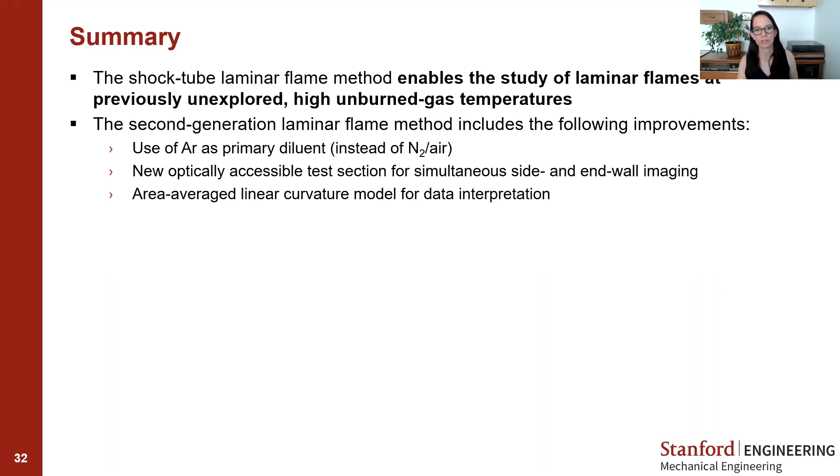I then showed 2 case studies, but the ethanol flame speed case study in particular showed that kinetic models can accurately capture these high temperature ethanol flame speeds as long as they're using appropriate small molecule reaction rates. We showed that for some of the top small molecule reactions, just by bringing those into convergence with available experimental results, we see large improvement in the kinetic model predictions.

We also noted that the power law fits conventionally used to extrapolate low temperature flame speeds up to high temperatures don't accurately capture the high temperature trends we're actually seeing in our data. We propose using something like a non-Arrhenius form in order to capture those high temperature trends.

And then finally, I provided basically a first look at some of our most recent ammonia flame speed work.

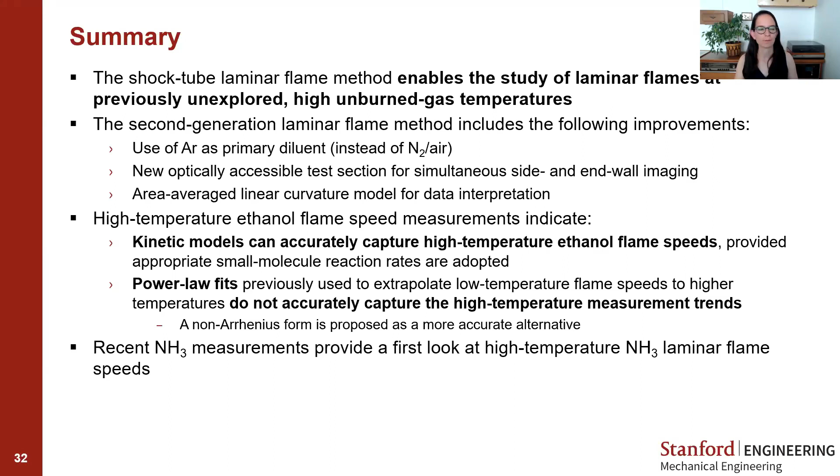Looking ahead, I'm really excited about this method. I think there's a lot of research and good science to be done here. Obviously, we want to expand the number and types of fuels we're studying with this approach—looking at biofuels, fuel blends, real fuels—and also pushing to additional pressures.

All the data that I showed today was acquired at 1 atmosphere, and so we're looking to try to push up to higher pressures if possible.

Outside the realm of just measuring laminar flame speeds, I think there's a lot of interesting novel flame phenomena we can look at with this approach as well. For example, looking at the impact of pre-ignition chemistry on laminar flame propagation, or looking at flame shock interactions, flame wall interactions, hemispherical flames. I think the list goes on.

And I'm happy to talk offline with anyone who's also interested in trying to use this approach to study new phenomena.